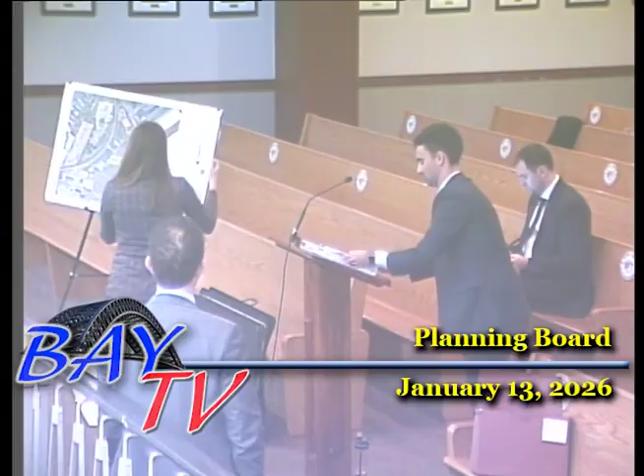So Lindsay, why don't we get the board oriented to the existing conditions very briefly, and then we can go into the proposal before the board. I'm going to bring up Exhibit A29, which is an aerial exhibit. This is prepared by your office, correct? This is aerial exhibit prepared by Stonefield dated 1/13/2026. This is a high-quality recent aerial image depicting the subject property and the surrounding properties and streets.

This property is located at the intersection of New Hook Road and New Jersey Route 440 to the west, in the northernmost portion of Block 453.03, Lot 1.01. The overall shopping center has an area of 28.5 acres, and our project area is a pad site within the shopping center consisting of approximately 1 acre.

The site is accessed from existing drive aisles from Bayonne Crossing Way, the internal collector driveway within the shopping center, and access to the overall shopping center is provided via ingress and egress driveways on all 3 frontages: Route 440, New Hook Road, and East 22nd Street to the south. This project area, as previously testified, was occupied by a single-story Sonic drive-in restaurant with drive-through lane and 4 drive-in canopies. The subject site is zoned HC, Highway Commercial, Select Light Industrial, with industrial and commercial uses to the north, east, and south, and vacant land to the west.

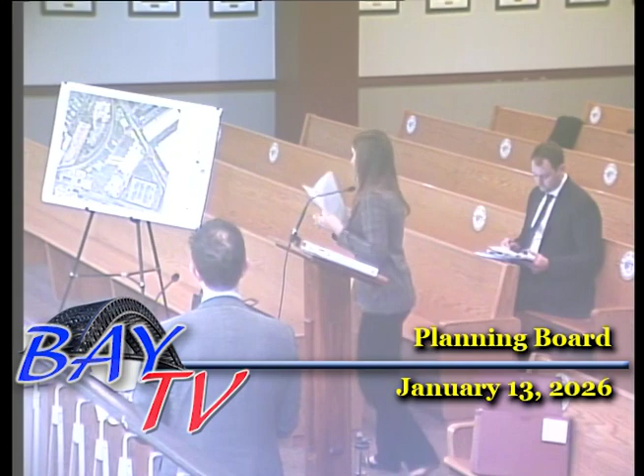Now that we're oriented, I will introduce our next exhibit, which will depict the proposed condition. Indicate the number of that exhibit as it's listed. A30. Also prepared by Stonefield Engineering, correct? Okay.

This is just a colorized version of the previously submitted site plan with the landscaping shown as well. The proposed redevelopment includes interior and exterior building renovations and improvements to the parking and drive-through configuration. The existing 2,660 square foot building is proposed to remain, and we are not proposing any additions or changes to the footprint of the building. We're proposing to remove the existing Sonic drive-in canopies within the parking area to accommodate 2 drive-through lanes and a pass-through lane.

The drive-through lanes are separated by a 2-foot wide striped area, and the lanes themselves are 12.5 feet wide. This is intentionally a bit more than a standard drive-through, as we are providing space for employees to maneuver in between the lanes. As was previously testified, employees will take your order at your car and then deliver it to you in the vehicle, so we need to provide a bit more safe, maneuverable area for employees to walk between the lanes, as well as guide vehicles through the drive-through lane.

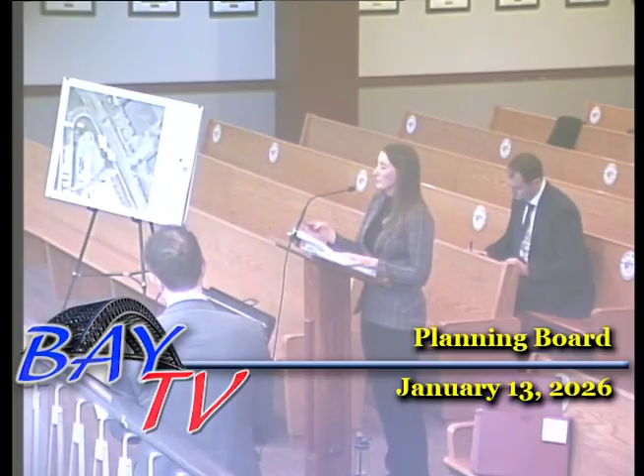The pass-through lane has a minimum width of 16 feet, is variable, but that's the minimum. This queue accommodates 29 vehicles, which is anticipated to be more than sufficient to support this proposed development. For reference, the 3 locations in New Jersey that are open have queues of about 20 to 22 vehicles. Given that the menu is limited to beverages and prepackaged snacks only, there's no food prep, so transaction times are reduced from a typical drive-through use. There's a constant flow through the drive-through, and to accommodate that, size queue is more than sufficient.

The pickup area is not a typical drive-through window. It is a sliding door that we're adding to this existing building. So employees walk out, take orders, and then deliver the orders to customers' cars. We provide 11 parking spaces, dimensioned 9 by 18, inclusive of 1 ADA space. These are for employees only, as previously mentioned.

There's no customer access inside the building, and there's no seating, so those 11 spaces are to accommodate the maximum 8 employees on a peak shift.

We do require a parking variance, as the calculation is related to square footage of retail sales, and the service area inside the building is 808 square feet, which equates to 33 parking spaces. So the use does not require more than 8 to 10 parking spaces. We're providing 11, so 33 would be excessive for this use.

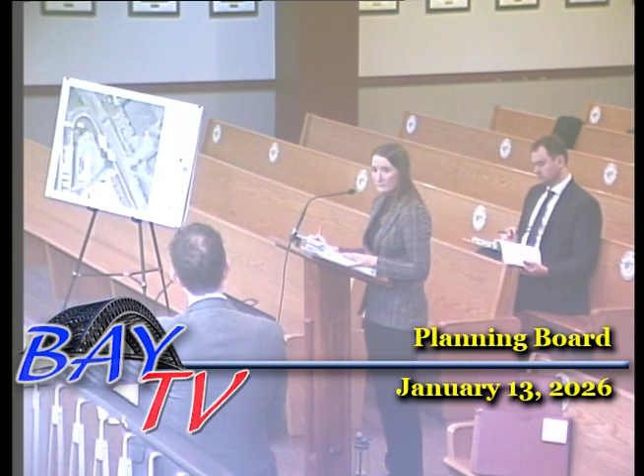Just to be clear, what's the relief that we're seeking for there? How many are required and how many are we proposing as part of the application? 14 required, 7 proposed. And we'll work with the board planner to provide additional plantings to his satisfaction.

We're also requesting relief for the minimum caliper of street trees. The requirement is 3.5 inches, and we're proposing 2.5 inches. The board planner did recommend that that exception be granted for this reduction as it's standard.

We have no other objections to the comments provided by the board engineer with regard to landscaping.

I'll touch briefly on stormwater. The site is categorized as a minor development from a stormwater perspective, which means that we're not subject to DEP stormwater requirements. The project reduces impervious coverage by 23 square feet and does not result in increased runoff. Also, because we're adding grass areas, water quality will naturally be enhanced with that addition of pervious surface.

Drainage is collected by the existing on-site stormwater conveyance system and stormwater detention basin that's underground. That is all proposed to remain. We are proposing to make some minor adjustments to the existing storm structure, rim and grate elevations to accommodate our grading updates, but other than that, we are maintaining the existing stormwater system, reducing runoff into that system.

We did receive some stormwater-related comments from the board engineer, which we will work with him to address during resolution compliance.

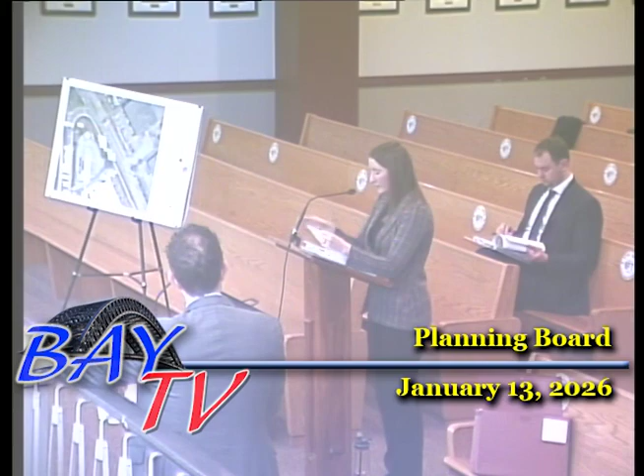Now I will pull up the colorized elevations that were prepared by Kinetic. Before you do that, there was a comment both in the engineer's letter and the planner's letter regarding a lighting plan. We have no objection to submitting one as part of any condition of approval, correct? Correct. All right, why don't we go ahead, now you can go to the elevations.

Just referencing what exhibit that is — A17.

Those were today's date, right? Of the rendering? 1/12/26.

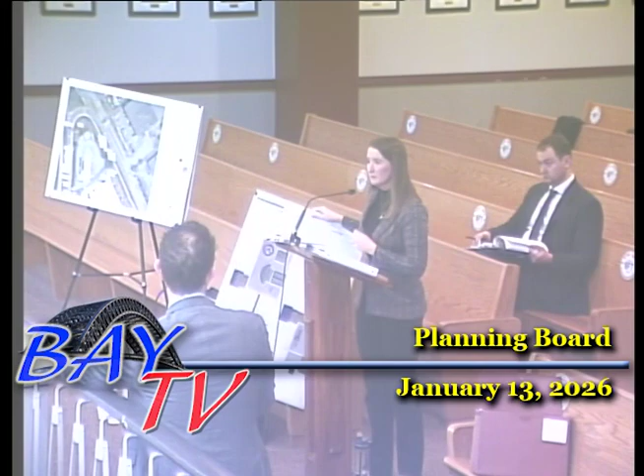Okay, these building elevations were submitted as part of our initial application. The exterior building improvements include a new blue brake metal canopy over the drive-through pickup area and a curved blue roof feature on the tower where there previously was a green Sonic roof. The blue color is central to 7 Brew branding and provides good contrast between the main building elements. The existing tower height is 25.5 feet and the proposed tower height is 27 feet.

The proposed canopy height is 10.5 feet with a 9.5 foot clearance, and there will be signage provided on the canopy with regard to the clearance. The existing neutral beige siding and stone along the bottom and within the tower are proposed to remain. The existing doors and canopies are to be painted to match 7 Brew's branding, so that's a blue and dark gray color scheme as shown in this rendering. The rooftop mechanical equipment will be concealed by the parapet, and there are no changes proposed to the roof.

This first page here shows the front and rear facades. We are proposing wall signage on each of these. We have a 28.3 square foot circular logo sign in the top right on the front facade, as well as a 7.7 square foot directional chevron sign on the bottom left for balance. We are requesting variance relief for directional sign area as well as sign height. The ordinance is kind of written to apply to freestanding directional signage. There isn't anything specific related to wall-mounted directional signage, but just to demonstrate compliance with that section, technically we would require relief. The maximum area is 4 square feet, where 7.7 are proposed.

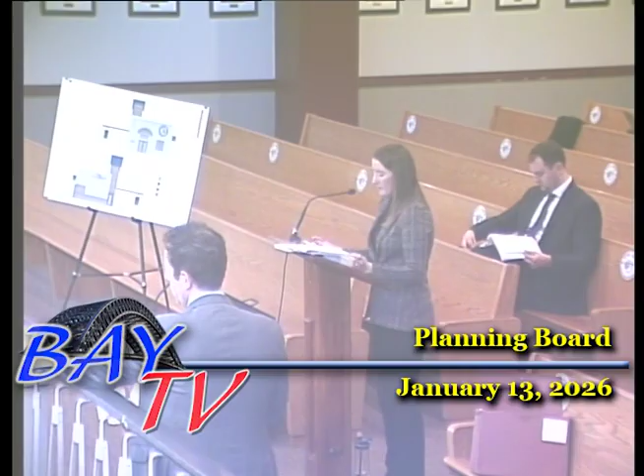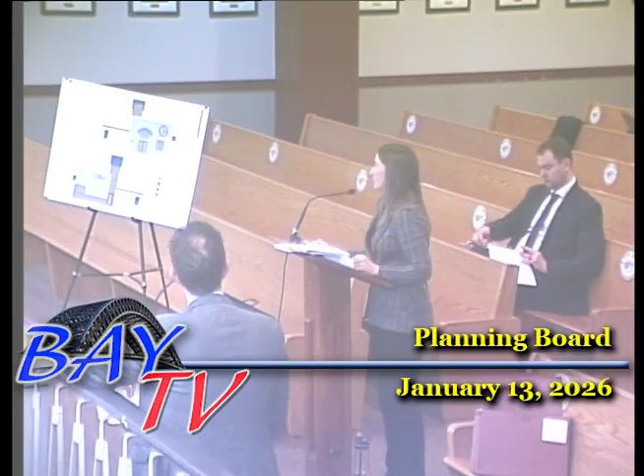These existing doors and windows on the front facade are to remain, but they will be permanently locked. They're more just to provide the appearance of a front of a building, though there's no actual access. So the access would be around the side to the pickup area, which I'll show in a moment. The rear facade, which is facing the north, the hard corner where the intersection is, that will have a 42 square foot 7 Brew letters sign. And that view also shows the digital displays, which are under the canopy. They're mounted on the columns. And that just shows menu information, promotional items for customers while they're waiting in their vehicles.

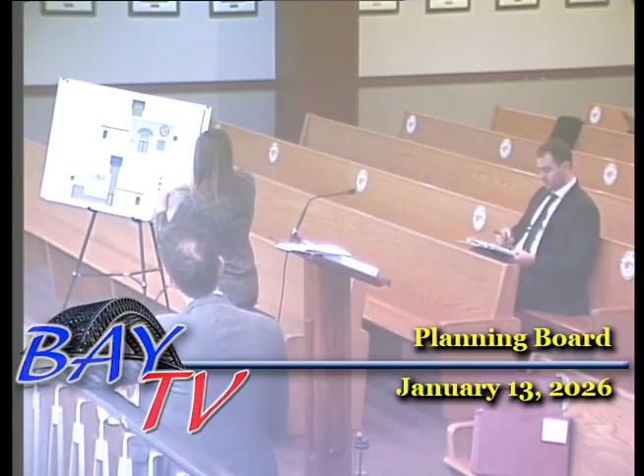This is page 2 of that same exhibit. This is the right facade to the west facing Route 440 and the left facade to the east facing Hook Road, respectively. So on the right side, we're proposing another 42 square foot 7 Brew letters sign on the tower. This side contains the pickup area and the proposed canopy, which will serve as the building's principal entrance in the proposed condition. The left facade, we're proposing red chevron directional arrows, again, 7.7 square feet. We will require relief for the area and the height of that sign as well.

Regarding freestanding signage, there's an existing Sonic panel on the monument sign for this center along 22nd Street, which we will be replacing with a 7 Brew panel. That's 14 square feet. We're not proposing any window signage as part of this application. All right, and then also, Lindsay, if you said it already, I apologize, but any of the rooftop mechanical equipment will be screened, correct? Correct. Okay. There's no changes proposed to the roof, and they're currently screened. Okay.

I'll briefly discuss the bulk requirements, just for the record, before I turn it over to any questions. So the use, which is commercial retail, is permitted in the HC zone, and the layout meets all bulk requirements within that zone. There are no applicable front or side yard setbacks. The site complies with rear yard setbacks. Lot coverage, the requirement is 65%. Existing shopping center lot coverage is 26.7%, and we are unchanged for the overall shopping center lot coverage.

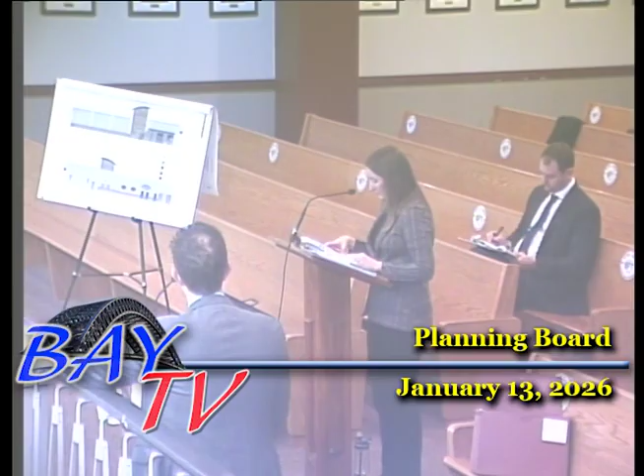That concludes my direct testimony. The remainder of any comments that I didn't explicitly address, we will work with the board professionals to address to their satisfaction. Thanks, Lindsay. Okay, thank you. Commissioners, any questions? Okay. Anything down the end here, Mr. Slaw? I have a couple of questions for Ms. Reist.

So in terms of the use of the bypass lane for loading and unloading, you had said that that is a quick loading, unloading, but what kind of time frame is that actually being blocked? 15 minutes. Okay, and how are deliveries scheduled? Are you able to discuss that? Yeah, I thought Zach stated that, Brian. I apologize, but we said during off-peak hours, so they would schedule during their off-peak times.

There's not a lot of off-peak time, though, is there? Well, Zach, you want to come back up real quick, just because you've operated. Or do you mean off-peak in the sense, not during your peak customer hours? Correct. Yeah, peak customer hours. So our peak customer hours are typically 8:30 a.m. to about 10:30 a.m. on weekdays, and about 9:30 a.m. to around 11:30 a.m. on weekends. And we schedule all deliveries to be outside of those hours.

So with your existing 7 Brew franchises, where you had noted that during peak hours you typically have 20 to 22 vehicles stacked for pickup, in off-peak hours, do you know what that number is typically? We're typically at about, and John, the traffic engineer, was going to go through that more exactly in the traffic testimony, but mid-single digits, lower figures. So in theory, they could be in one lane. In theory, they could, but we find it to be less efficient for the customers. It does not go as fast.

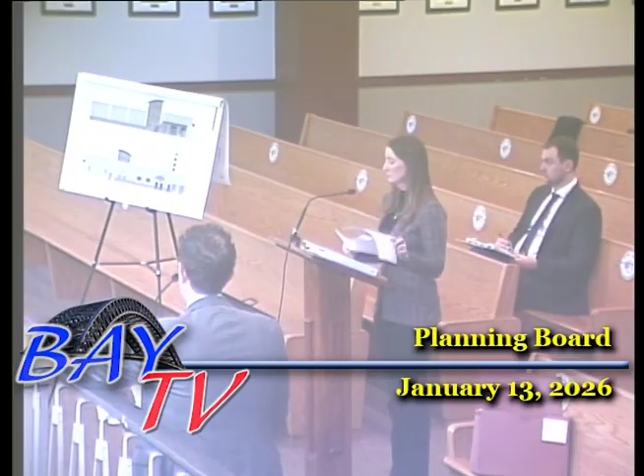Since you will not be meeting the 14 trees, is the applicant willing to donate to the city's tree fund per tree? Yeah, as long as there's an ordinance that indicates the amount, we'll look at the ordinance and we can comply with it. It's $250. Okay, yeah. This might be more appropriate for your traffic engineer, but you're willing to submit a site circulation plan for all your design vehicles showing that there's not a conflict? Yes, we can do that, that's fine.

There was an item about vehicles parked adjacent to the trash enclosure. Did you look into if there would be a conflict with the doors open, if they'll hit a vehicle? So they wouldn't hit a vehicle. Also, I'll note that those are employee parking spaces only, so they would only be utilized during shift changes when employees are leaving, and that most likely would not happen at the same time as trash delivery or unloading.

And lastly, the utilities that are existing are sufficient enough to service the new restaurant? You're not going to have to make any site improvements for your water services? That's correct. We anticipate that, given that the Sonic use and usable area within the building is larger, it would be sufficient in terms of intensity of use as compared with our use. And we will submit applications to Veolia and Bayonne Utility Department to verify that. Okay, thank you.

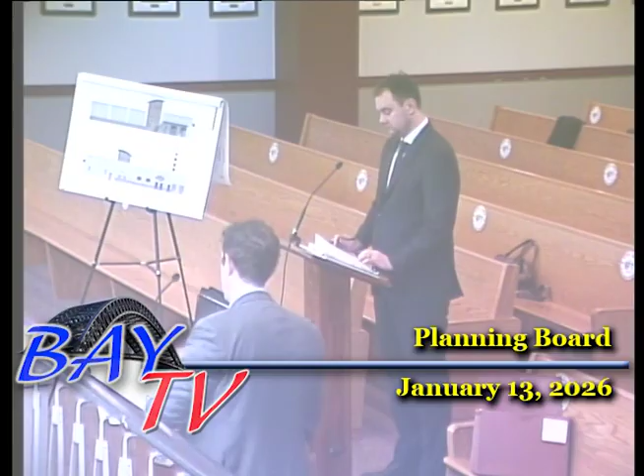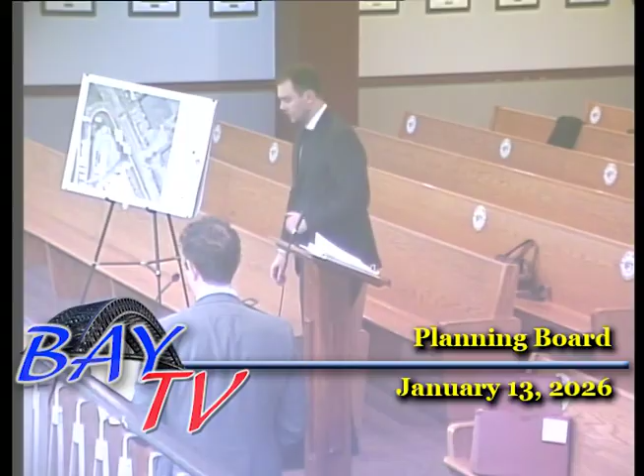So, John, if you could break down your testimony into three parts. One would be trip generation, the other would be on-site circulation, which includes the queuing, and we also need a parking variance. I know Zach spoke to it, but if you could also provide testimony on the justification for the parking variance. Yeah, of course. So I have back up the rendering of the site, this being somewhat of a reoccupation of that Sonic drive-in and drive-through restaurant. So we're going from one drive-through use to another. We're situated in the Bayonne Crossing Shopping Center, along Route 440, which carries about 40,000 vehicles per day.

So the site itself is located a good distance away from any of the existing access points serving the shopping center. When it comes to the traffic generated by the 7 Brew use, compared to the Sonic use, especially in Sonic's heyday when it was new and exciting, it's certainly not going to be a significant traffic impact, especially as it relates to 440, which carries a substantial volume of traffic. We have received a letter of no interest from the New Jersey Department of Transportation. Of course, they control Route 440.

They opine in their letter that the proposed change in tenant will not generate significant increase in traffic, and accordingly, no new access permit is necessary from the department. As it relates to the queuing and stacking, a little bit different than how the Sonic operated, where they had the one drive-through lane and then the drive-in parking stalls.

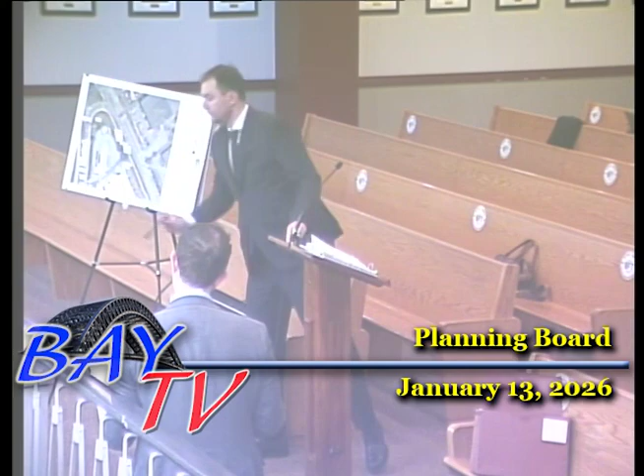So a 24-foot aisle is typically required for those 90-degree spaces. Given that it's the low turnover, employee-only spaces, a 20-foot aisle is navigable, but it is tight. But generally speaking, employee turnover does occur during those off-peak periods, so you would have the second drive-through lane typically. But a 20-foot wide aisle is something that can be navigated. And given that it's employee-only, you have a familiar driver in those parking spaces.

All right, and then in your professional opinion, the drive-through directional sign is appropriate and facilitates site circulation? Yes, definitely. These drive-through directional signs are something that customers are looking out for, not just at 7 Brew, but at pretty much any drive-through use to try to navigate sites and understand where to go in the larger scheme of the development of the shopping center. All right, so to sum it up, the parking, in your professional opinion, is sufficient as proposed? Yes, and providing 37 would be overkill.

And the queuing and circulation works properly? Yes, and the full bypass is a benefit not only to accommodate the loading, but also during those peak periods, especially in the outside lane. You get your drink order before someone in front of you, you can depart using that bypass lane and continue on your way. Okay, thank you very much. I have nothing further for Mr. Korak. Okay, thank you. Commissioners, any questions?

Okay, any questions down the end? No, I thought that was an adequate explanation. Thank you. Okay, thank you. Do you mind just speaking to the cars that are in the outermost drive-through lane yielding to cars in the bypass lane? I just feel like typically when you get a drive-through order, it's unusual to turn and look for a bypass lane. Is there any concern with that?

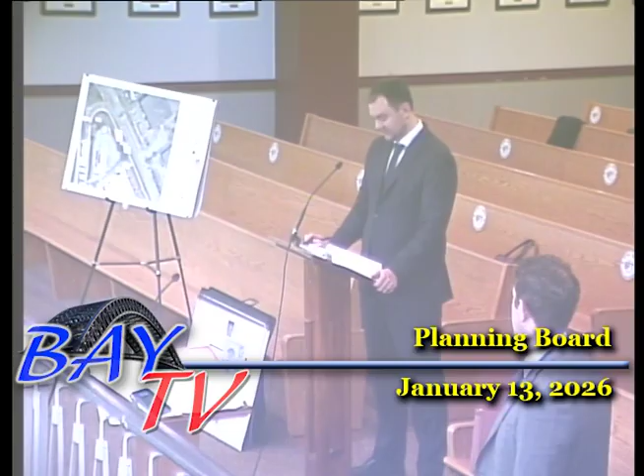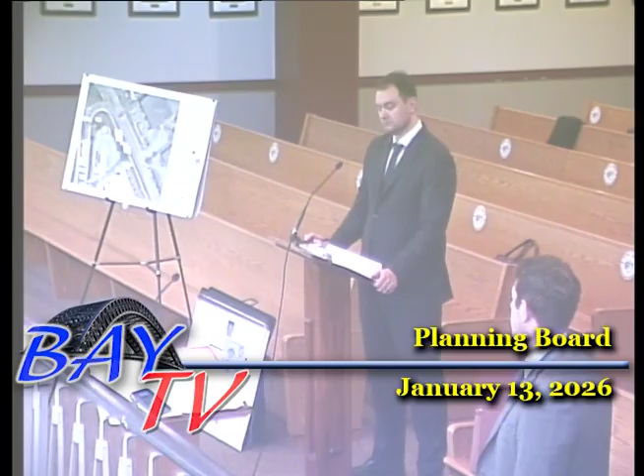It did not meet any need to do anything more, but just keep us in the loop, because otherwise we have to stay in the loop anyway. So I appreciate you sending us the letter. Pinnakin's back now. He was on vacation. So we do have 3 active applications out there right now, so it's helpful to work with you, but we totally concur with DOT that this does not generate a new application. Fantastic. I'll forward that letter.

Okay, thank you. At this time, we'll see if there are any members of the public that have a question for Mr. Korak. I do not see any, so thank you, Mr. Korak, and you may move to your last witness. Yeah, thank you, Madam Chair. Our last witness is our professional planner, Kristen Shepard, from Cafone Consulting Group, so let's swear her in. I do. Yes, Kristen Shepard. Last name is Shepard.

Okay, good evening. And Kristen, if you can give us your qualifications as well, educational background, experience testifying before other boards, and whether your license is current and in good standing. Yeah, sure. I'm a professional planner certified in the state of New Jersey. It is valid and in good standing. I've been AICP certified for the past 8 years, and over the past 10 years, I've created and been part of the implementation of dozens of master plans, of comprehensive plans, including associated zoning ordinance recommendations, and I have prepared numerous planning outlines and provided testimony before land use boards across New Jersey.

Okay, we accept Ms. Shepard as an expert witness. Thank you and welcome. Thank you so much. All right, and Kristen, as part of your preparation, you visited the site and the surrounding area? I did, yes. You reviewed the relevant sections of the city's ordinance and master plan? Yes. And you've heard all the testimony and reviewed all the application materials that are part of the record? Yes. Okay, so why don't we focus on the variances that we're seeking and the justifications for them?

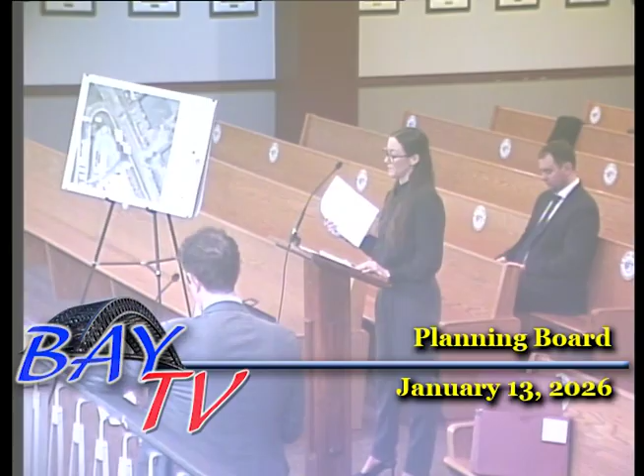I'll move into the second prong of the negative criteria, which is supporting the goals of the master plan. Bayonne's 2017 master plan is very specific in what they're trying to do with economic objectives, and I believe this proposed use furthers those. I will specifically speak to purpose number 2 and purpose number 7. I won't read them verbatim, but purpose number 2 is to focus on economic activity, specifically along Route 440, and number 7 is to encourage selected retail, office, and light industrial use on Route 440.

I believe 7 Brew is probably one of the more perfect niche operations that could exist in this area. Our office in particular has worked on nearly a dozen of these applications, and every host community that has brought this market niche into their area has been excited about this opportunity, so we're excited to have the opportunity to bring it to Bayonne.

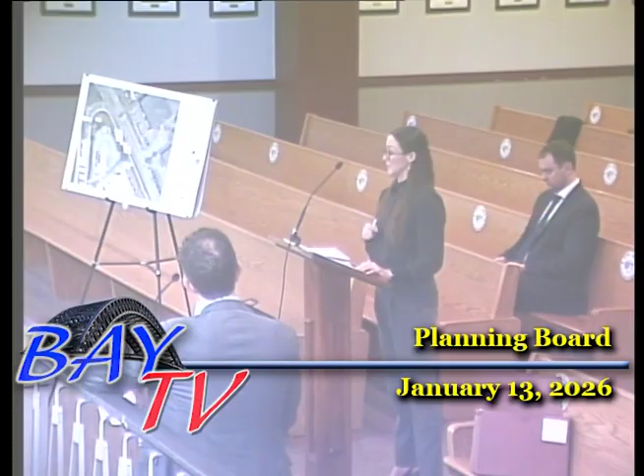I'll finalize my testimony by mentioning the Pullen versus South Plainfield Planning Board decision, which holds that the board may consider the benefits of the application as a whole when weighing the potential detriments. In this case, I do find that the benefits substantially outweigh the detriments here. So it's my conclusion, in my professional planning opinion, that this application meets its statutory burden of proof and that the entirety of the requested relief should be granted without substantial detriment to the public good or impairment to the zone or the master plan.

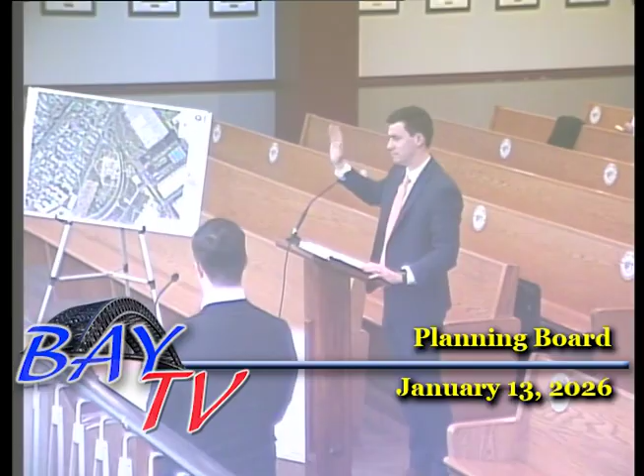Do you want to? I do. Yes, my name is Tory Bingaman, T-O-R-Y, Bingaman, B-I-N-G-A-M-A-N.

Tori, can you please provide your educational credentials and whether your license is still in good standing? Yes, I have a Bachelor of Science in Civil Engineering from Lafayette College. I've been working in civil engineering for about 10 years. I'm a licensed professional in the state of New Jersey, and my license is in good standing.

Tori, did your office have the opportunity of preparing these site plans? Yes, we did. Did you have an opportunity to review the site plans, including the stormwater investigations? Yes, I have. Why don't you walk us through what we're proposing here today, and please identify and address the comments and concerns of the board's professionals.

I'll start with a review of the aerial map exhibit noted as A29. Just to familiarize the board with the site, it is located formally at block 45202, lot 5.01, along Route 440, at the intersection with New Hook Road and the Jug Handle Ramp C, which is shown on the plan. The site is immediately across from the Bayonne Crossing Shopping Center, which the board is familiar with. It is immediately north of Lot 4.01 to the south, a city-owned lot, as well as another lot to the southwest, the former Bayonne Industries tank farm site, all of which will be part of the overall future redevelopment of this tract.

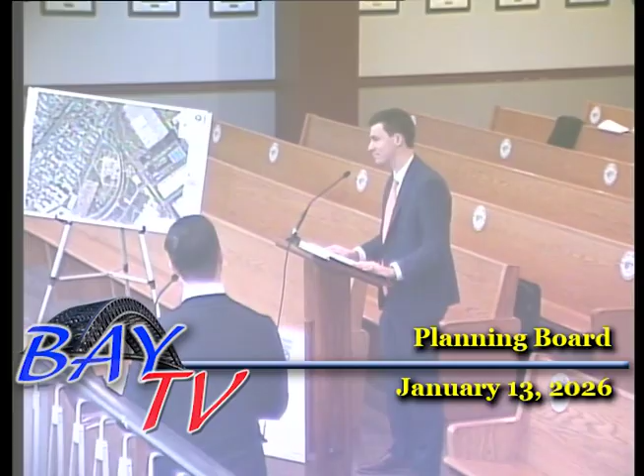I'll now be referring to Exhibit A30, the site plan rendering. It's a colorized version of the site plan submitted with this application, and it also depicts the proposed landscaping. As mentioned, the site is in the West Route 440 redevelopment area, and we're proposing a temporary parking facility primarily focused on the long-term parking and storage of vehicles as described by Mr. Posada. This will include 350 12-by-30 parking spaces to accommodate potentially a larger fleet-style vehicle. The maneuverability around the site can accommodate those vehicle movements as well as larger vehicles.

I know the board's professionals have requested some additional turning movements be provided, and our office can provide those if the board accepts this application. There are no proposed buildings on the site, and we do have some signage along the site frontage. At the driveway, there is a proposed monument sign, which will include the parking, hours of operation, and contact owner information as required. There's also some incidental signage related to the flood hazard area approval, which has to note that the site, driveway, and portions of the area on site are subject to flooding as they are below the flood hazard elevation as determined by DEP.

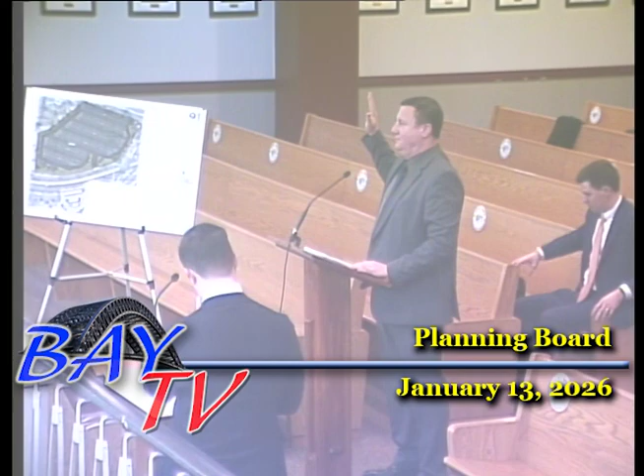Are there any members of the public that have a question? Okay, seeing none. Mr. Posada, you can move to your second witness. Absolutely. My next witness will be my traffic engineer, Craig Peregoy, also from Dynamic Engineering. Good evening. Hello. Yes, I do. Craig Peregoy, P-E-R-E-G-O-Y, with Dynamic Traffic, 245 Main Street, Chester, New Jersey. For the record, I've testified here many times. Yes, we accept you as an expert witness. Welcome back. My license is still current. There you go.

Craig, did your office have an opportunity to prepare a report entitled Circulation and Parking Assessment for the subject property? We did. And also that assessment was contemplating the proposed use that we're discussing here tonight? Yes. Why don't you walk us through your findings and conclusions? Sure, and a lot of the discussion was already had.

Sue was talking about the DOT stuff, which was part of the reason that I'm actually up here testifying instead of just sitting in the back, but I'll go through it a little bit. Again, this is a long-term parking facility. ITE actually does have trip rates for a long-term parking facility. They also have a parking lot, which I think was mentioned in the review letter. The parking lot would be open to the public, people going in and out. It could serve some adjacent use or be a park and ride. That's not this. So what we're doing is indeed the long-term parking.

And based on the ITE's numbers there, it generates very little traffic realistically. There'll be days probably when nobody goes in and out of here. But based on the ITE numbers, it would generate just under 20 trips in a peak hour. I don't think you're ever going to see that. When you had the manufacturing plant there, it was certainly a lot busier. You had employees in and out every day, tractor trailers. There was a truck parking operation going on there for a little while. So this is a much quieter use than what's been going on out there.

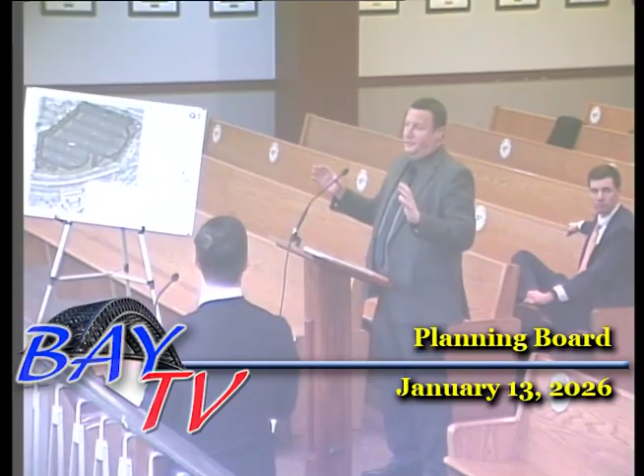And importantly, it's below what DOT calls a significant increase in traffic, which if you generate more than 100 peak hour trips, then they would require us to get an access permit. If we needed to get an access permit for this site, they would make us reconstruct that entire driveway, put sidewalks, and all kinds of things that we do want to do when we get to the ultimate development, but there's no reason to do that for this. Basically a continuation of an industrial type of use, not a use that's open to the public or has residents.

So ultimately, we will do that pre-app meeting that Sue was mentioning with the DOT. We will be involved with the other applications and coordination. That driveway will be located where it makes sense for the new plan rather than permitting it where it is now and then letting that tail wag the dog for the redevelopment. So the idea is to keep everything in the DOT right-of-way the same.

We do need to go for a drainage permit, which we'll need to do a traffic control plan for. We can extend that into the driveway area to do the repairs on the curb apron. We can replace anything in kind that's there. We just can't do a new driveway. Or more importantly, and I think this should give you comfort, we can't do anything that's going to generate significant traffic, or then we would need the DOT permit. So we're constrained not only by the requirements here and what we're representing, but by DOT's standards as well.

I think that really covers it. I know you guys discussed a little bit more when Sue was mentioning the DOT, so I don't want to beat that to death. I think everybody understands the goal here. And the prior comment that we heard from this board was regarding actual setbacks for the gate itself. Would it also be your testimony that a tractor trailer could pull up, and if the gate weren't open, they wouldn't interrupt traffic? Yeah, we'll make sure that gate's positioned properly, that was a good point.

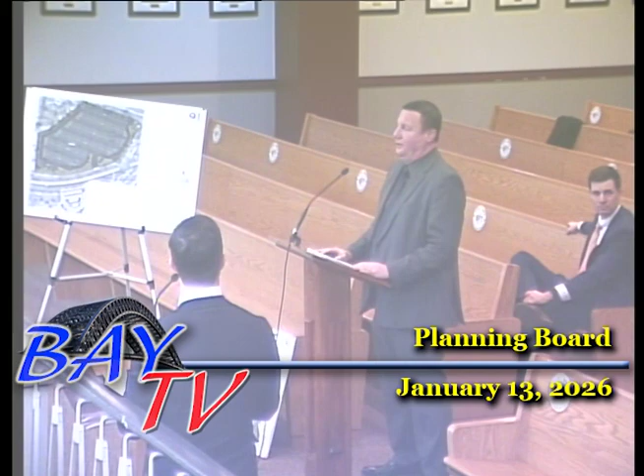Any other commissioners, questions? I see Ms. Mack, you have your hand up? No? Commissioners, please, I'm sorry. I don't think any commissioners have questions, so the floor is yours.

Again, it's a little bit informational, but informational for the board. We've been to DOT several times on this. We can only have one driveway on 440 between the jug handle and 22nd Street. And actually, we have to share the driveway. We own property ourselves, the city owns property, and we have to share the driveway. I'm hoping as we continue on this, maybe they'll let us reconfigure it a little bit more, but that question's been asked and answered.

We can only have that one access point on 440, which goes back to my real concern tonight, the jug handle. You cannot have any access off the jug handle, either in or out, and that's why I'm saying be considerate of that, because that's DOT's jug handle. Yes, they're very protective of ramps. If it says ramp on their maps, there's no way you're getting a driveway.

And just my opinion, this would be permittable for a LONI as long as you're not doing construction, you get your drainage permit, and you're not upsetting the jug handle. And I believe this qualifies for a LONI. Yeah, it will, but we will need those other permits from DOT. Yeah.

Okay, thank you, Ms. Mack. Down the end? Nothing of this witness. Okay, thank you. Mr. Isigno, I see your hand coming out over the screen here. Come on up. Mr. McDonough, you're going to have to wait a moment. Okay, Mr. Isigno, go ahead with your question.

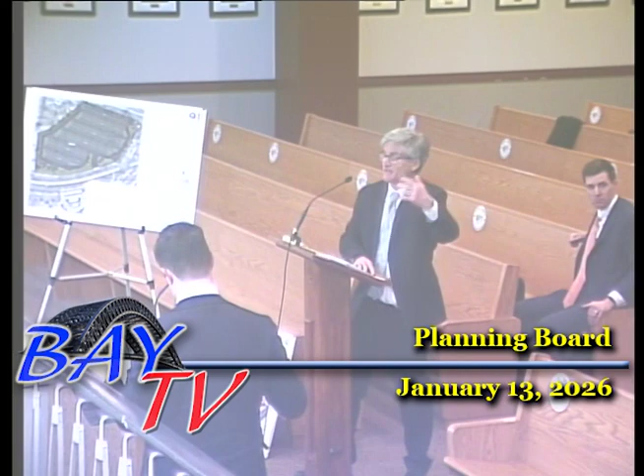This is a visually prominent location in the community. It's that bump out right on 440. Currently, in its present condition, it is clearly contrary to the vision for a focal point at this location. Any investment on this property is a good thing, and the fact that the applicant is going to introduce some order here, some landscaping, some lighting, some physical improvements will certainly be an improvement over the stagnation that has been there at this visually prominent location for a long time.

So if we look at the application holistically, we certainly see the planning benefit of the promotion of the general welfare, repurposing a site that is sitting well-suited to accommodate the use that's before you. It's essentially cleared, it's flat, ideally suited for the use that's before you as a long-term commercial parking lot.

We're also looking at Purpose M, our planning goal for efficient use of land, repurposing a site that has been developed for non-residential use for a long time, and then certainly Purpose G, to provide for a variety of uses in appropriate locations. This is going to be vehicular storage along a transportation route, so we've got good connectivity, good accessibility to the regional highway network, which goes towards the suitability of this site for the use that's before you.

In terms of the negative criteria, I think it's been well vetted. The questions that have been asked by your professionals, that have been asked by the board as well, will ensure that relief can be granted here without any substantially adverse impacts to the public, or certainly without impairing the fulfillment of the redevelopment plan, which is certainly to create a revitalized focal point at this location.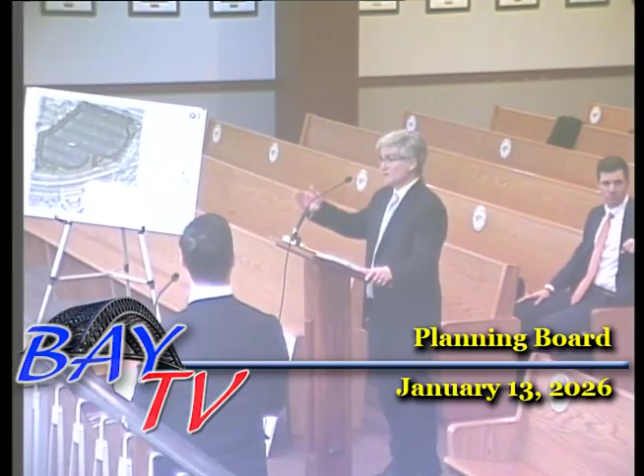All said, I think this application meets the criteria under the C2 balancing test as a better zoning alternative for the property. There are certain elements of hardship here as well, given the fact that we are reworking a developed piece of property. So I think the stronger proof is on the C2 side, but the board can also move favorably on certain aspects under C1 hardship as well. That said, I believe the criteria are met and approval is warranted. I have no further questions for this witness.

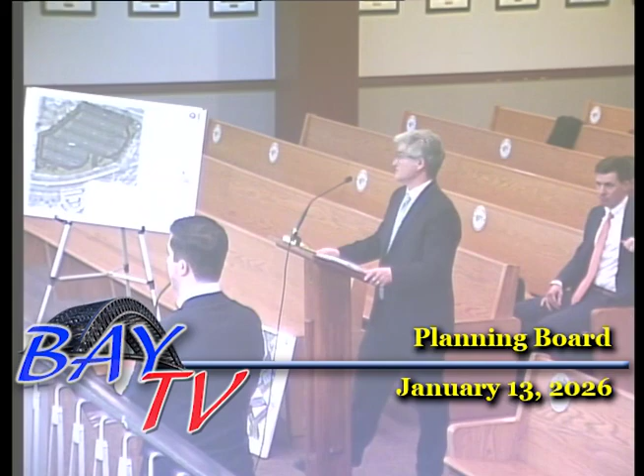Okay, thank you. Commissioners, any questions? Okay. Mr. Slaw? Well, I would say, I don't think I could have said it better myself. I agree on the C1, certainly with the lot size, nothing else that can be done there. And I agree with the C2 characterizations for the other ones. It'll help effectuate, just on an interim basis, making this a much more attractive prospect from the public right-of-way, which would be a benefit from what we see today.

It'll provide cash flow for the redeveloper, which will assist them, instead of seeking perhaps a less well-thought-out redevelopment plan that then doesn't come to fruition, to have a better thought-out redevelopment plan that can be brought to a proper resolution between the city's objectives and their objectives. So I think that it will be a good use for the city. Okay, thank you. Any additional?

Okay, Ms. Mack? I just want to agree with Brian, but I also want to say that Brian did the original scattered site 14 a decade ago, and as we know, redevelopment plans are supposed to spur economic development. Luckily, we were able to have residential development down at the end. The Clayton Block, when we tried to do other things there, there was community objection because of the prior use. And I believe what Mr. Posada says is this is an interim use.

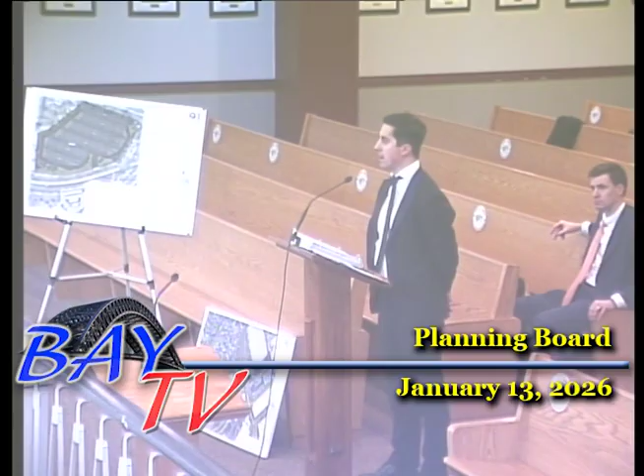Posada, I'm going to ask you to repeat that to the board with regard to where the obligation arises from. It arises from a redeveloper agreement, which is between the city and the parties to whatever the original traffic control agreement was, not this board. Yes, that is correct. I just want to expand that a little bit. It is between the city, meaning the city council, and the private parties themselves to that contract. That is also a contract between 2 different parties that had a meeting of the minds and engaged in negotiations for the exchange of consideration in order to execute that agreement, none of which my client was ever involved in.

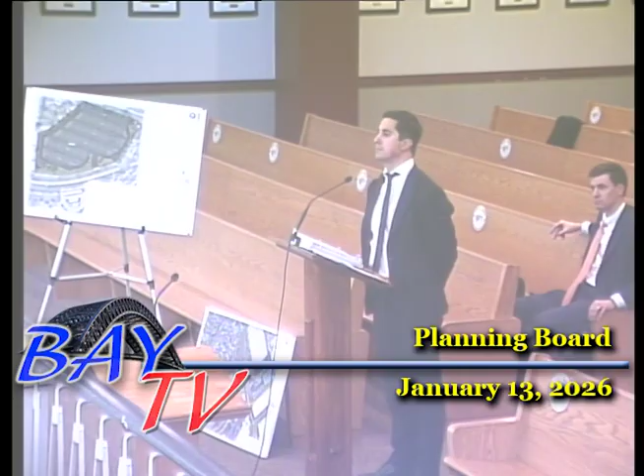Not asking about your client, I'm asking about the board itself, because if I'm just clarifying the parties to the REA. Yeah, but the City Council and 195 Urban Renewal. So this issue will be resolved in the Superior Court at some point in time. Yes, the Superior Court of Hudson County. Okay, thank you for the clarification.

Commissioners, anyone wish to make comment? Normally we don't, Mr. Golden, but being that it's a legal issue, we'll give you the opportunity. Come on up.

Just want to correct mischaracterizations of the operative clause, and I just want to read it into the record.

Section 3.02B of the June 29, 2016 redevelopment agreement says the redeveloper, meaning my client, in lieu of paying a fair share for traffic and other off-site improvements on a prorated basis as required by the MLUL, shall install a new traffic signal with directly related infrastructure improvements, defined as the traffic improvements at the intersection of Route 440 and East 22nd Street. The city shall not be responsible for contributing to the cost of these particular traffic improvements.

The city, last time I checked, the planning board is part of the city, will require monetary contributions from any and all owners, developers, redevelopers proposing or developing non-residential projects or enlargements of existing residential projects, capital improvements, access improvements, or parking areas from and after the date hereof on a fair share basis whose properties and/or projects are located within 3,000 linear feet in all four compass directions measured outward from the center of the intersection adjacent to my client's project premises. There is a map attached to this, which is part of the record, which clearly shows this is within the 3,000 linear feet.

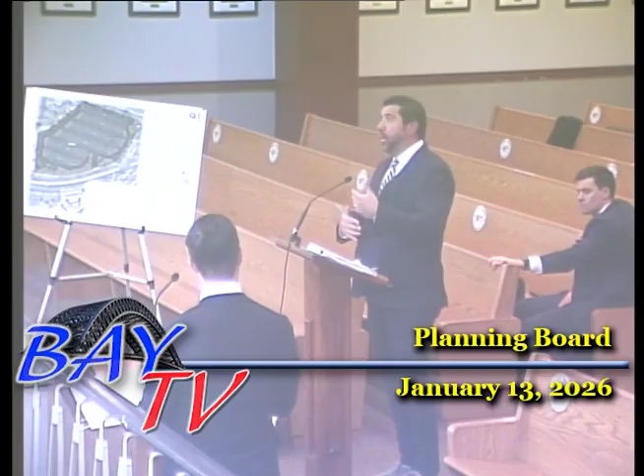But the last time I checked, the city of Bayonne, a body politic established pursuant to NJSA statutes, this planning board is part of the city. And I don't think there's another step between now and this being completed where this contractual obligation will be met. And it is the city's requirement to require the monetary contribution and use good faith efforts to do so.

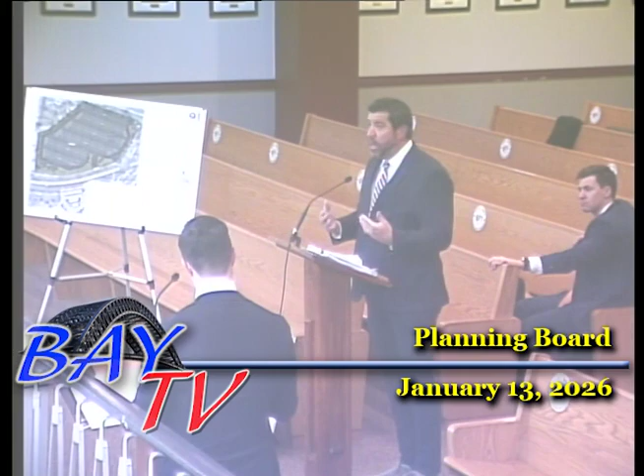That's the basis of our letter. That's the basis of our statement, not an objection, but as an interested party seeking that that condition be part of the approval if the board were so inclined.